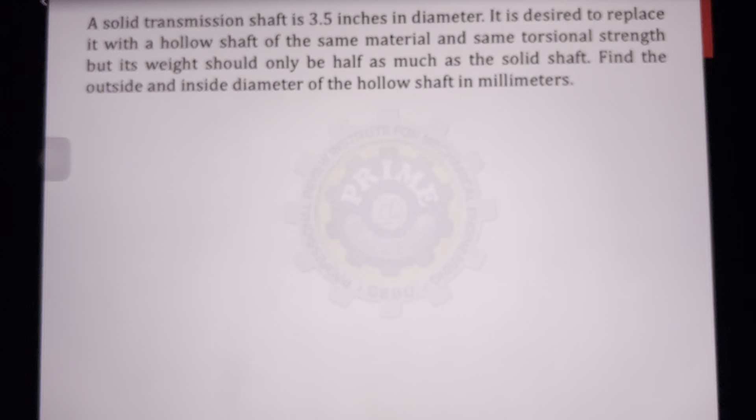A solid transmission shaft 3.5 inches in diameter is desired to be replaced with a hollow shaft of the same material and same torsional strength, but its weight should only be half as much as the solid shaft. Find the outside and inside diameter of the hollow shaft in millimeters.

So dalawang hinahanap sa atin, the outside and the inside diameter. Ang binigay lang sa atin ay ang diameter ng solid shaft, which is 3.5 inches. First, since millimeters ang hinahanap natin, simulan natin by converting it into millimeters as well. So sa 3.5, para maging millimeters, multiply natin ng 25.4. So ito yung magiging 88.9 millimeters. Meron tayong diameter ng solid shaft, at yun lang ang given.

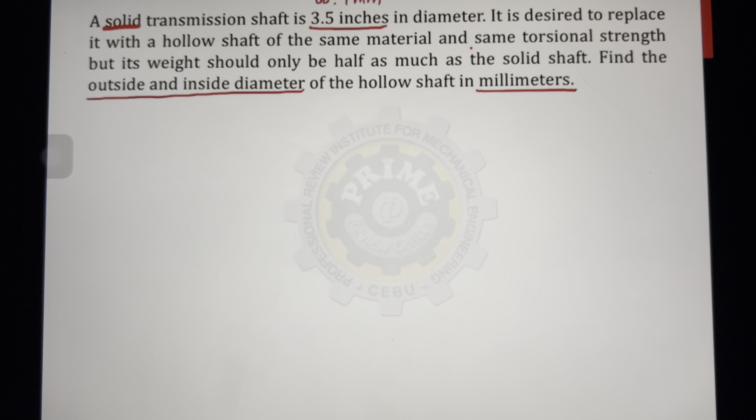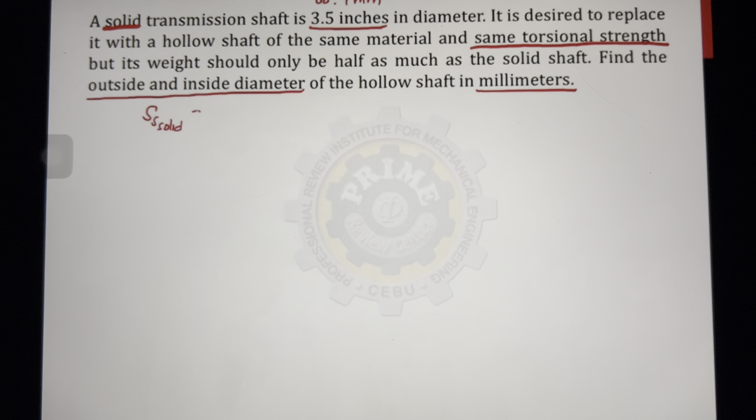Since dalawang hinahanap sa atin, the outside and inside diameter, kailangan din natin ng dalawang equation. Una, sabi sa problem, the solid shaft and the hollow shaft have the same torsional strength. So torsional strength or our shear stress, equal daw ang shear stress ng solid dun sa shear stress ng hollow.

So equate natin ang formula ng shear stress ng solid and hollow. For the solid shaft, it is equivalent to 16T over pi times our diameter of the solid shaft cubed. And for the hollow shaft, walang sinabi, so gagamitin natin dito ay yung maximum, which is the shear stress at the outside, which is 16T times the outside diameter over pi times dO to the fourth minus DI to the fourth. Of course, cancel ang ating pi, same torsional strength, so cancel din ang term T. Of course, cancel ang 16.

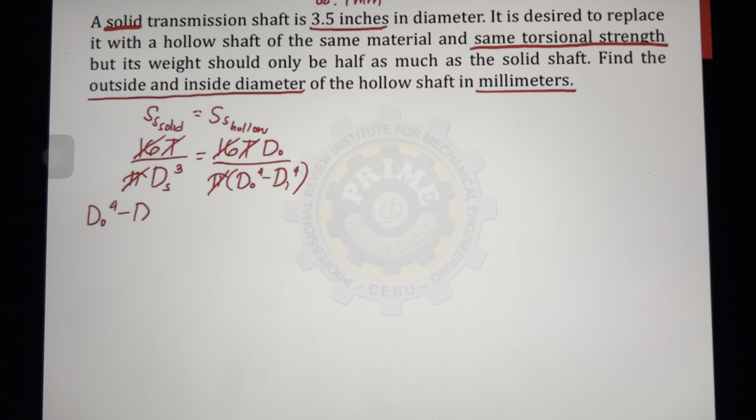I-cross multiply natin, so magkakaroon tayo dito ng relationship na dO to the fourth minus DI to the fourth. It's equivalent to dO times the cube of the solid diameter, which is 88.9 millimeter, raised to 3. So yan ang ating unang equation.

It is our first equation, which includes the outside and the inside diameter. Ano pa ang ating pangalawang pagkukunan? Sabi sa problem, kung may same torsional strength, pero yung weight daw nila, the weight of the hollow shaft should only be half as much as the solid shaft. Mas magaan daw yung ating hollow shaft by 50%. That's our second relationship. Weight of the hollow shaft is equal to 1/2 as that of the solid shaft.

Paano ba natin kinuha normally ang weight? Kailangan natin ng specific weight. This is the specific weight multiplied by the volume, of course, and this is for the hollow shaft. Ganun din para sa solid.

Sabi sa problem, they have the same material, meaning they have the same specific weight. So pwede natin masabi na equal ang kanilang mga volume. Ano ba ang volume? Ang ating shaft, para they are in the form of a cylinder. For the cylinder, which is a prism, ang general formula ay area times length. Para sa hollow shaft, ano ba ang area ng hollow shaft? This is pi over 4 times dO squared minus DI squared multiplied by the length.

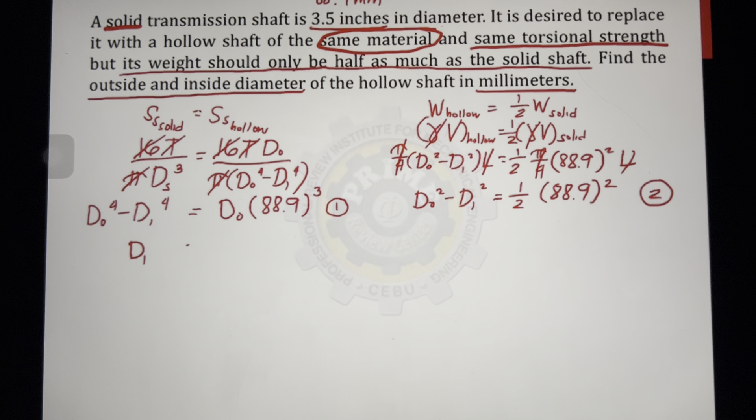Dito, kung ititira ko dito ang ating inside diameter, so matitira ang dO to the 4th minus, iuuna ko yung 88.9 cube multiplied by dO. Kaso dito, ang ating inside diameter ay naka-raise sa 4.

Para matira ang inside diameter, so ito ay magiging 4th root. So yan ang ating equation ng inside diameter. At ipalit natin tong equation na to dito sa ating inside diameter.

So using the substitution method, pag pinunta natin ang inside diameter, magiging isa na lang ang variable natin, outside diameter. So using our equation number 2, this will be DO squared minus, palitan natin ang inside diameter ng 4th root of DO to the 4th minus 88.9 cube times outside diameter, and then naka-squared is equal to 1/2 times 88.9 squared. So we only have one variable.

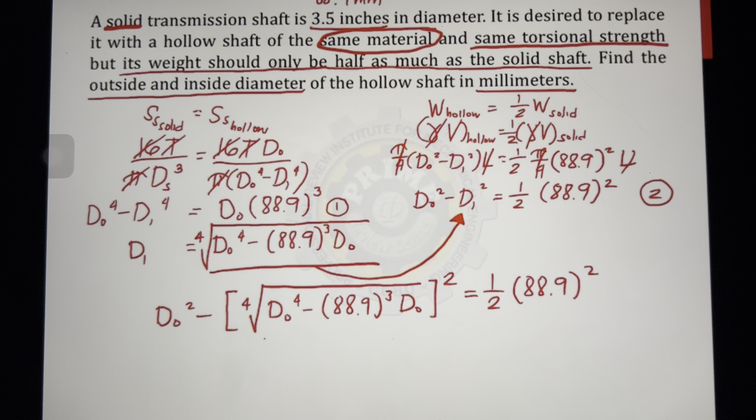What is our outside diameter in millimeters? Outside diameter is equivalent to 107.31 millimeters. So that is our first unknown.

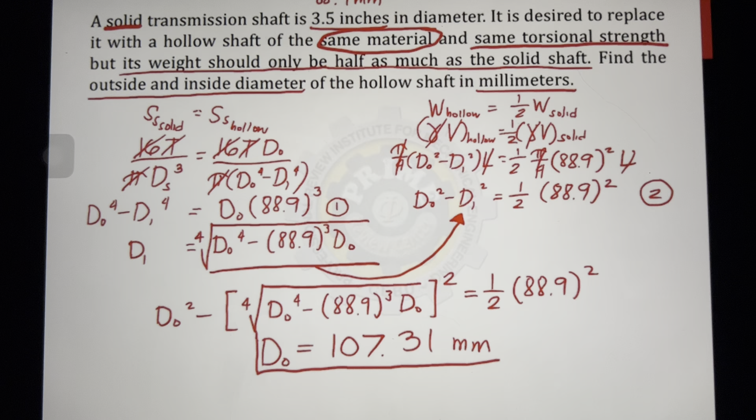So ngayon naman, paano hahanapin ang inside diameter? Balik tayo sa na-generate natin ang formula ng inside diameter. Yung ating na-solve na outside diameter, ipalit natin dito para makuha naman ang inside diameter. So our inside diameter equivalent to 4th root of this is 107.31 raised to 4 minus 88.9 cube multiplied by 107.31.

What is our inside diameter in millimeters? It is equivalent to 86.97 millimeters.

So there we have it. Nakuha natin ang ating outside and inside using algebraic methods. Since dalawang kailangan ko ng dalawang equation, so binasa lang natin mabuti yung ating mga question.

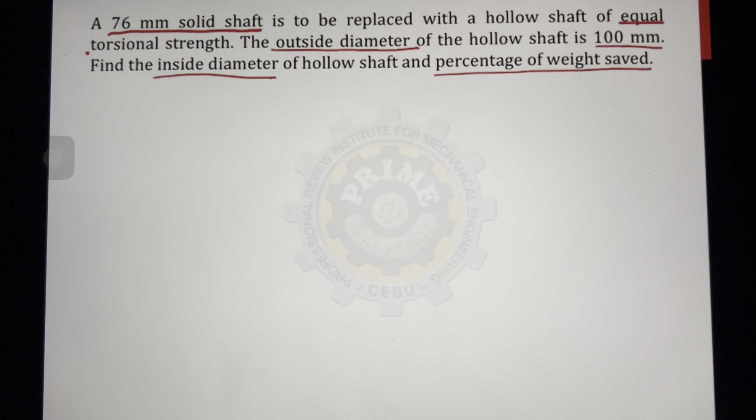So again, from our previous problem, ganun din ang ating situation sa problem na ito. Ang torsional strength daw ng ating solid ay equal sa torsional strength ng ating hollow. So kung ganito ating equation, pwede natin magamit yung na-derive natin kanina. So for equal torsional strength, ang ating na-derive ay ito.

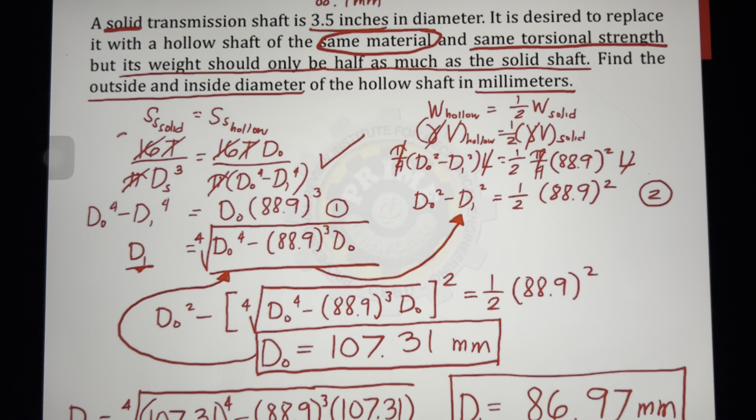So dito, kung i-cross multiply ko itong equation na to, magiging ang equation ay dO to the fourth minus dI to the fourth is equal to the diameter of the solid shaft raised to 3 times outside diameter.

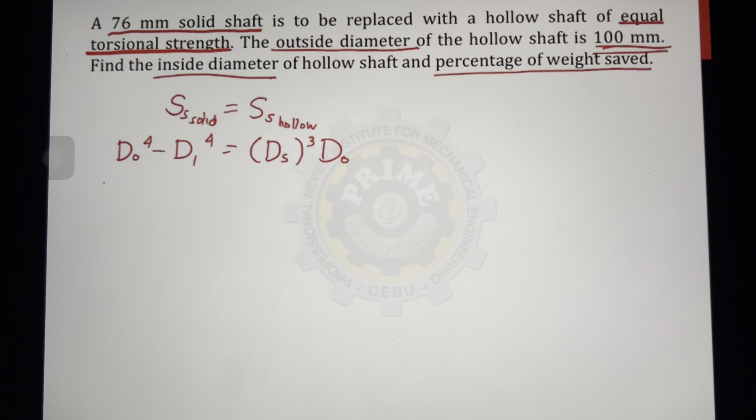Okay, so using our given, our outside diameter is 100 millimeters. And that will be raised to 4 minus inside diameter raised to 4 is equal to the solid diameter which is 76 millimeters raised to 3 times outside diameter of 100. What is our inside diameter in millimeters?

This is equivalent to 86.55 millimeter.

And then, for our second question here, nahanap ang savings in weight. So of course, ang sabi natin confidently, na since hollow yung gitna ng hollow shaft, mas magaan ito kaysa sa solid. So ang ating percentage savings will be its difference, which is the weight of the solid minus weight of the hollow over weight of the solid.

Or pwede rin 1 minus weight of hollow over weight of solid. Then i-derive natin ang pwede natin maging equation dito. So this will be 1 minus. So from our previous problem again, ang weight ay pwedeng specific weight times volume. So this will be specific weight times ang volume ay area times length.

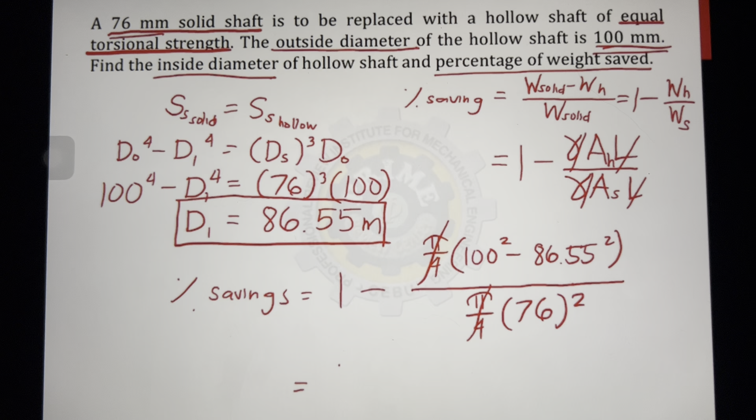It is equivalent to 56.55%. So that is the amount of savings in terms of weight. That is our conclusion for our shafting discussion.

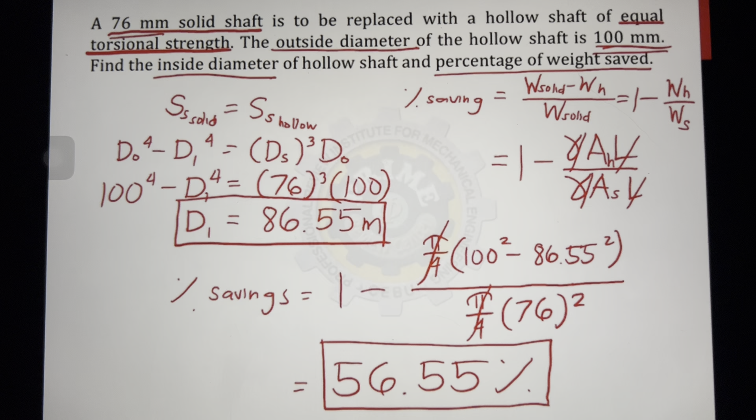So let's proceed with our next topic: Machinery's Handbook. So using the shaft design by Machinery's Handbook, diameter is equal to 0.29 times 4th root of torque. And another formula, diameter is equal to 4.6 times 4th root of power over N.

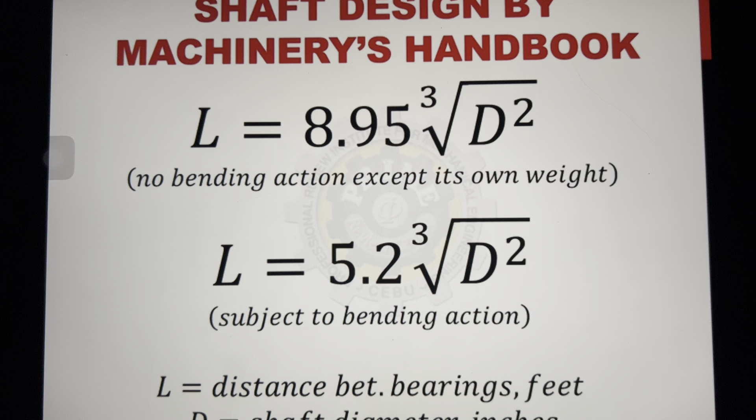Let's try this problem. A 20 feet line shaft has no bending action except its own weight. What power in horsepower can the shaft deliver at a shaft speed of 360 RPM? Consider that the torsional deflection will not exceed 0.08 degree per foot of length.

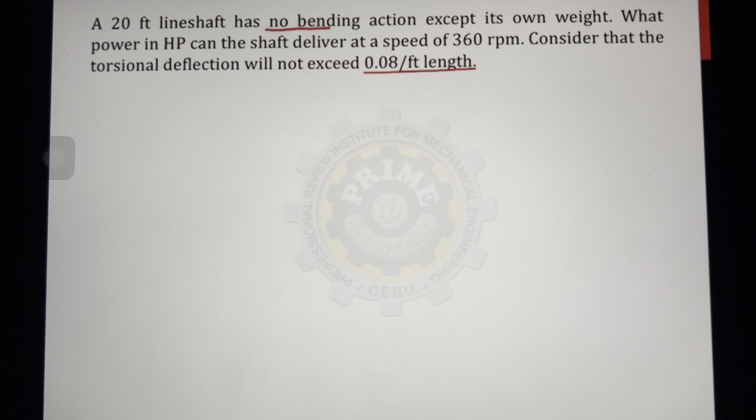And since power is missing, let's use the formula with power, that's d is equivalent to 4.6 times 4th root of P over N, where P here is in horsepower.

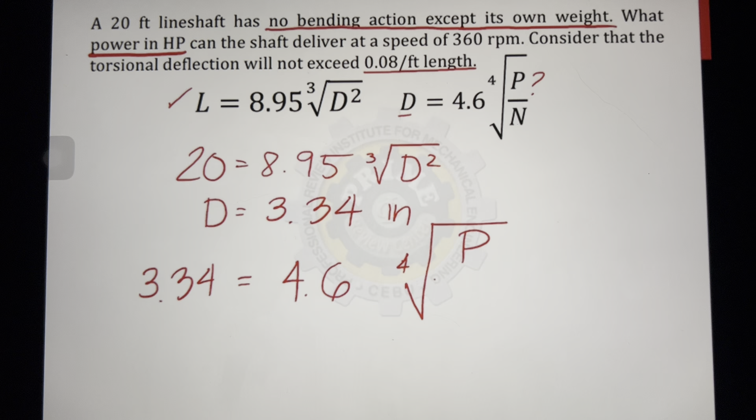So our diameter again is 3.34 inches. It is equivalent to 4.6 multiplied by 4th root of our power in horsepower divided by our speed in RPM, which is 360. What is our power? It is equivalent to 100.06 horsepower.

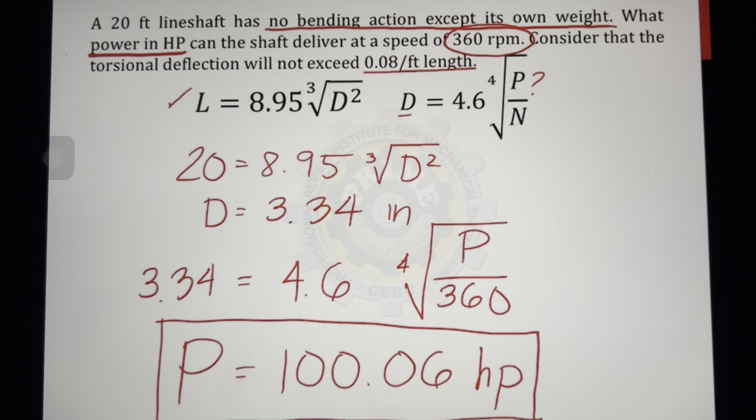For the next one, a 20 feet line shaft has bending action except its own weight. So meron tayong bending action. What power in horsepower can the shaft deliver at a speed of 360 RPM? Consider that the torsional deflection will not exceed 0.08 degree per foot of length.

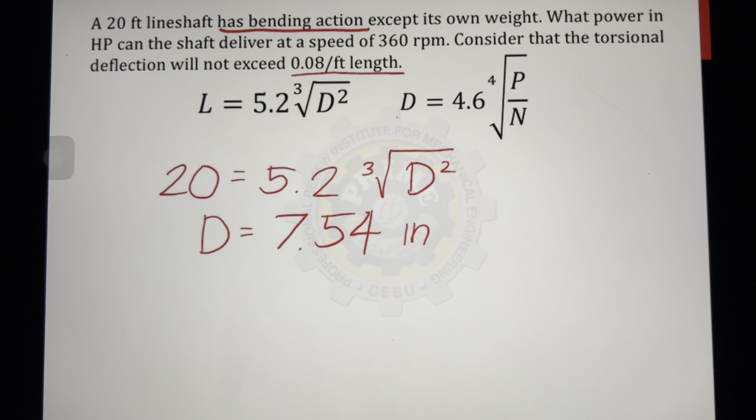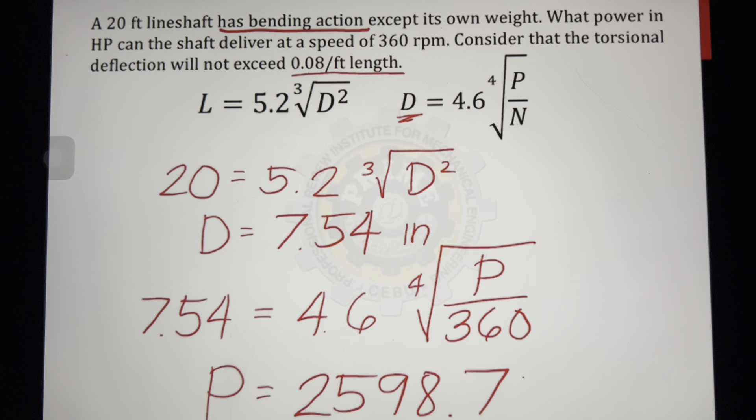So our diameter again is 7.54, is equal to 4.6 multiplied by 4th root of power over speed in RPM, which is 360. What is our power delivered? It is equivalent to 2,598.7 horsepower.